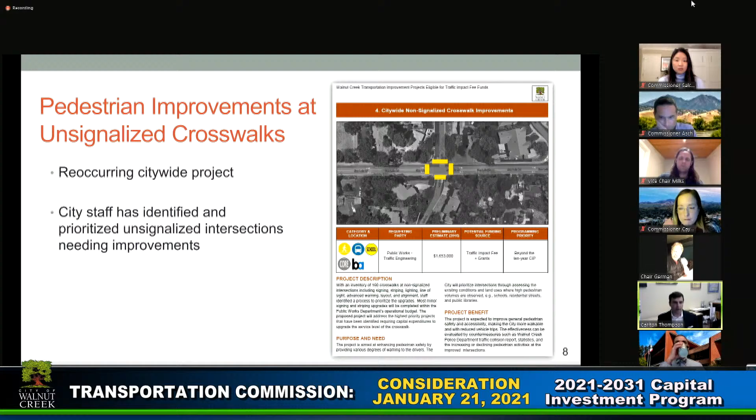The next project is the bicycle master plan. This is also project money to put into implementing facilities per the bicycle master plan. We've done a little bit of this already, and we're going to continue to add this to both the CIP and continue all the way out through the cycle, and then roll it into each of the budget cycles, the capital budgets.

Walnut Boulevard Sidewalk. This is a project that's been slipping back a couple of budget cycles, and we're going to commit to doing the preliminary design in '22 and '23. This is that sidewalk gap in front of Walnut Heights Elementary School. It's really difficult due to narrow roadway width and some right-of-way and grade difference, but this is that sidewalk gap closure between the county pieces that have already really been done up to the school.

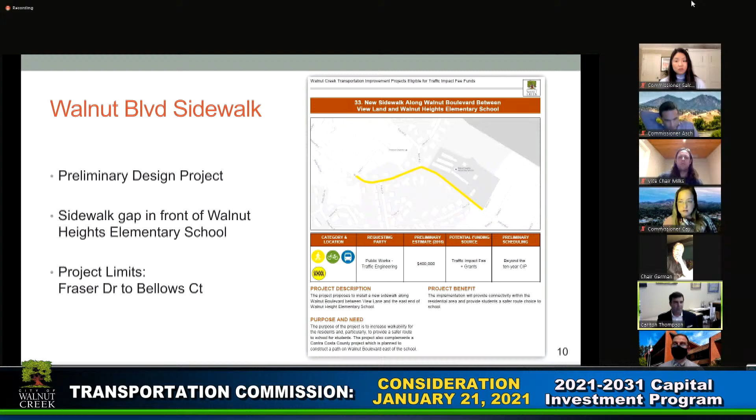This is a project that started off as just intersection improvements on Broadway that we brought to the commission back in 2019. And it has morphed into a whole corridor project that we've already started some preliminary layouts on, basically from YVR to Civic down the Broadway corridor.

This project is going to put a bit of Broadway on a road diet. We really wanted to make sure the commission got time to hear more details. I brought it to you back in November, and we said let's make this into one of those TIF eligible type projects, rather than looking at the intersection improvements themselves at Broadway and Arroyo and Broadway and Carlback. We're really looking at Broadway, between Ignacio Valley Road and Civic.

The intent here is that we want to implement a road diet, which is where you're removing a couple of travel lanes, reallocating that space for bicycle facilities, pedestrian facilities, and generally traffic calming and traffic safety improvements.

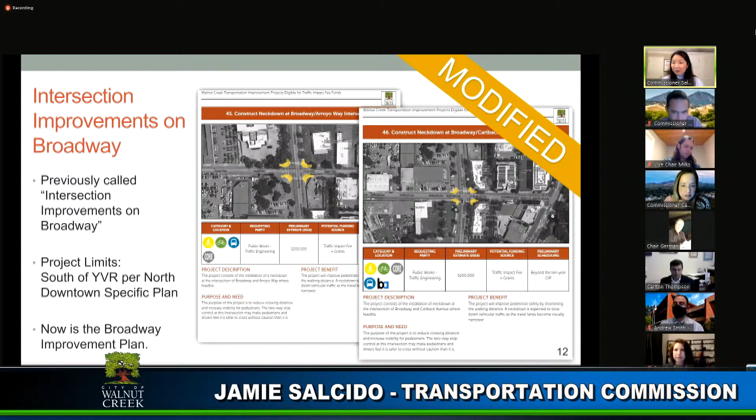Especially, I really like hearing that we'll be including green infrastructure, and I'm guessing that might include things like rainwater collection through cuts in the curbs, or I don't know exactly what would be included in that, but I like the idea of incorporating that, especially in the downtown area.

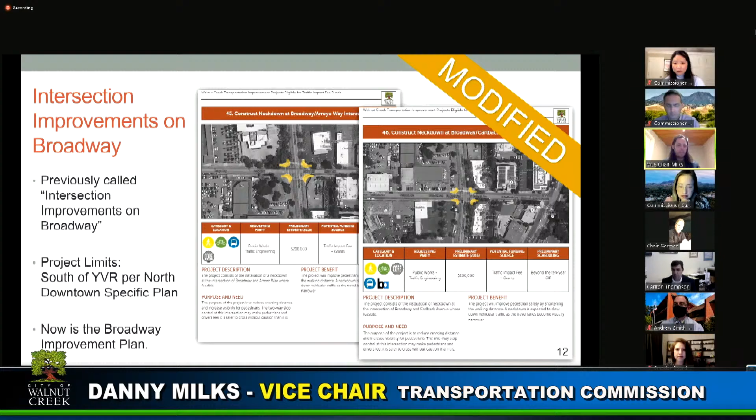I really like this project. I've always felt that between Civic Park and Main Street was kind of an ignored area. Everybody else has gotten improvements around there, but specifically on North Broadway, if you're trying to walk between the two, it's unpleasant, it's dangerous, it's not easy. So this is filling in that gap, and hopefully bringing a little attention to this part of downtown that has been neglected a bit - not intentionally, just by default. I wholeheartedly support this, and whatever you can do to make it easier for people to walk and bike between Civic Park and downtown would be great. And then also considering it might be going in with livable communities and affordable housing.

Car ownership is at least $10,000 a year according to any estimate. So if you talk about affordable housing, you can't talk about that without the whole picture, which includes transportation and options for walking, biking, mass transit, and BART. That to me ties it all together.

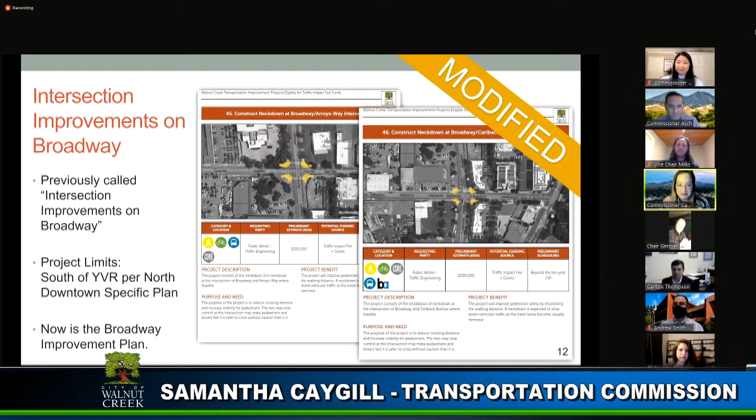This is Commissioner Caygill. You have my support as well. I think it's a fantastic project. Anything that helps move forward affordable housing, and also provides residents with access to our city's core, and transit, is just a fantastic project. I agree, it is a scary experience being a pedestrian in some of those areas, and crossing Broadway in some areas can be pretty scary. So I'm excited to see it move forward.

Would you mind pointing out on the map exactly where the housing is going to be located? It's not actually on any of these locations, but the housing location is at the intersection of Ignacio Valley Road and Civic. So it's just up to the north of where we're showing these maps. It's the southwest corner, the old abandoned gas station.

And separate from that, we've been receiving interest on the former DMV site, which is right there at the corner of Arroyo and Broadway, for some mixed use development in accordance with the North Downtown Specific Plan.

Fantastic. I would imagine that construction on top of an old gas station site will require quite a bit of environmental cleanup, hopefully. I wonder how long that will take. Yes, there's definitely something that would be analyzed and addressed before construction begins. My understanding is that a fair bit, if not all, of the necessary remediation has already occurred on that site. I think the tanks and everything are out of the ground. I could be wrong, but I believe that's the case.

Does this plan also include the abandoned restaurant across the street from the gas station? I'm sorry, what was the question there? Across the street from the gas station is an abandoned restaurant office now. Oh yes, adjacent to 1111 Civic, where the Mechanics Bank headquarters is. It might be now - a long time ago it was a restaurant.

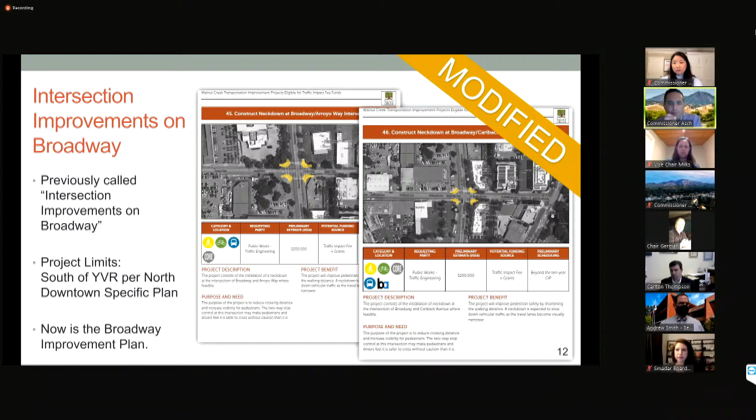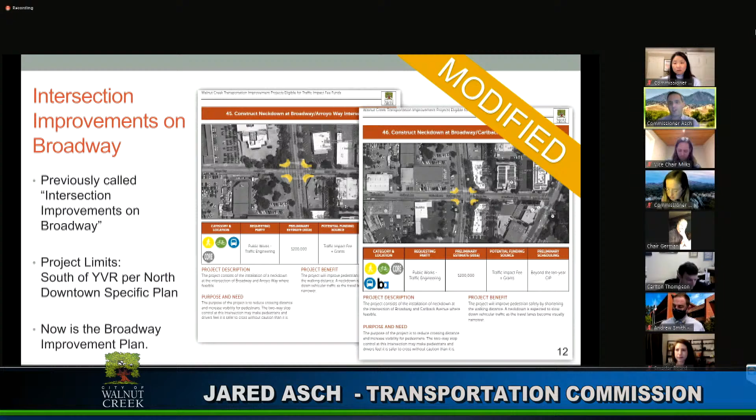So I like the project, I like the concept, I like that you're covering a lot of elements. As part of a traffic slowdown, which I get is the safety aspect, how does that affect the flow of cars, both in a normal non-COVID world of transportation down YVR towards BART and 680 and all of that in particular? Yeah, great question.

So this location actually was evaluated in the North Downtown Specific Plan and was specifically identified as an opportunity site for a road diet. Broadway got overbuilt on this segment. It doesn't really connect you to much - you end up kind of at a dead end. So right now people use it as a cut through, but it doesn't really gain you all that much in terms of travel time. I wouldn't take it. So we would rather put more effort on improving operations on the path of least resistance here. It was already evaluated as part of that North Downtown Specific Plan from the traffic analysis perspective, and we feel pretty good about not having to need that additional lane in each direction.

I will say that what we looked at preliminarily for this piece will line up with what we've recently completed on Broadway as part of the Broadway Parkside project, as we've reconfigured the lanes and added the bike lane on that segment north of YVR on Broadway.

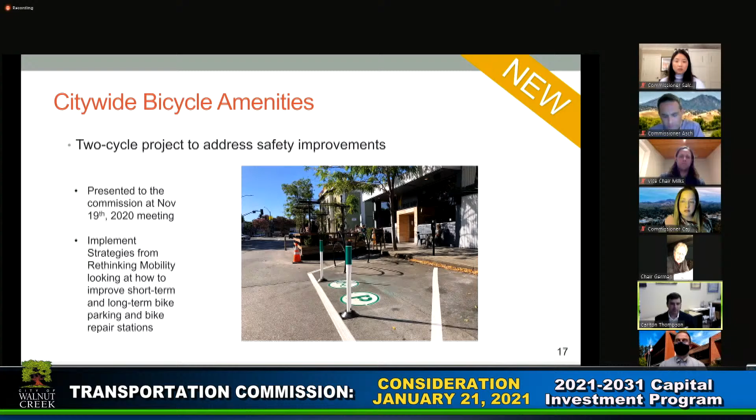Okay, so this is a summary. This is that first 2-year cycle. For 22, 23, this will become the transportation inputs to the capital budget. This is the amounts we think those projects are going to cost. And if there's anything unfunded, you'll see that in the far right-hand column before the notes.

There may be some opportunities for some grant funding or some funding to come from somewhere else. But right now, we're not recommending TIF money to go towards that particular project unless the commission decides otherwise. I will say that I'm starting with an estimated starting number of 4.6 million, so the TIF fund is healthy, and this allocation, if it goes forward as shown, would pull $1.4 million out of that fund for these projects.

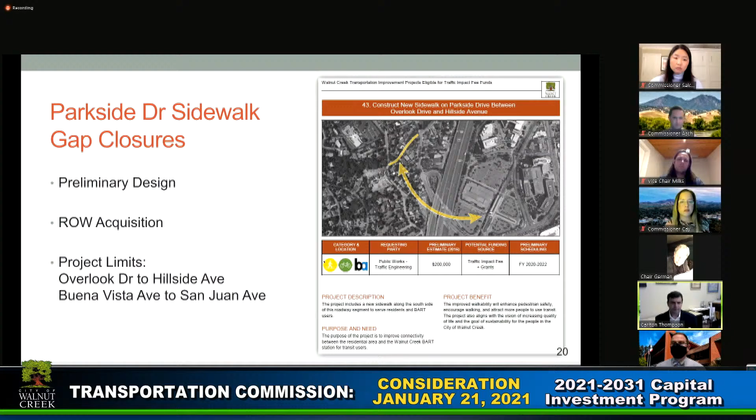This one is the Mobility Hubs project. It's been on there for a little bit. And I think as originally envisioned, the Mobility Hubs project was different than maybe it will be as it goes forward. Talking to the transportation planning staff, they will be looking for a possible TLC grant to fund $200,000 to start to really study this in more detail. But I know that they had originally looked at doing some bike share stations. That probably won't be what comes forward, but it may be something related to bicycles and charging or something like that.

I can add to that a little bit on the mobility hubs with regard to funding. We were approved a TLC grant, Transportation for Livable Communities, from CCTA, funded through Measure J, the transportation sales tax. But the COVID pandemic has had a significant impact on sales tax revenue, and since we hadn't actually been allocated the funds yet, this project, along with others benefiting from the same grant, has had its funding put on hold. It may come forward in the future, it may not, depending on anticipated sales tax revenues. So it's on hold for now, but we're still planning on going forward with it, just not right away.

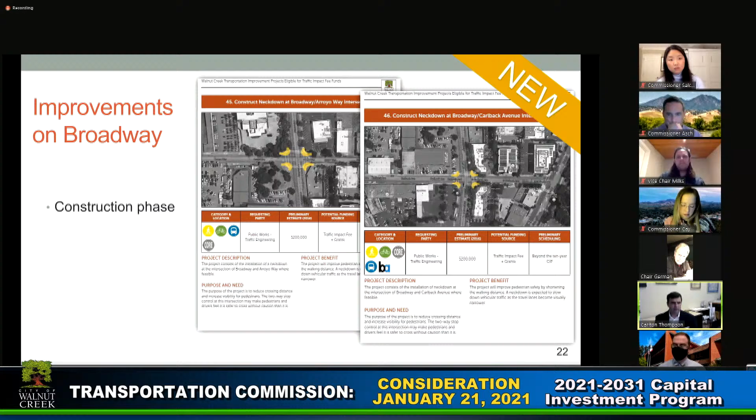Ygnacio Valley Road Safe and Smart Corridor Study - that's a mouthful. This project was suggested by the Transportation Commission in 2019 while we were doing our previous CIP update. It came out of discussion where it was suggested that we not only look around the BART station for connections to move people across YVR, but look holistically at the whole YVR corridor. So this will be a multimodal corridor study in partnership with CCTA. We've talked to them about this already, as it's more of a regional effort since YVR is such a heavily used transportation corridor for a lot of the county. That's kind of all I have for this one right now.

This is a big deal, actually, because it starts to set up some projects you're going to see later in the CIP, projects that provide other connections. Doing this study soon or early enough, with some of the money from CCTA that we hope to get as we come out of the COVID environment, will really help unlock and define some of those later projects. You want to add anything, Smadar? Any questions? If Smadar would like to add something, I don't want to interrupt that train of thought, but okay.

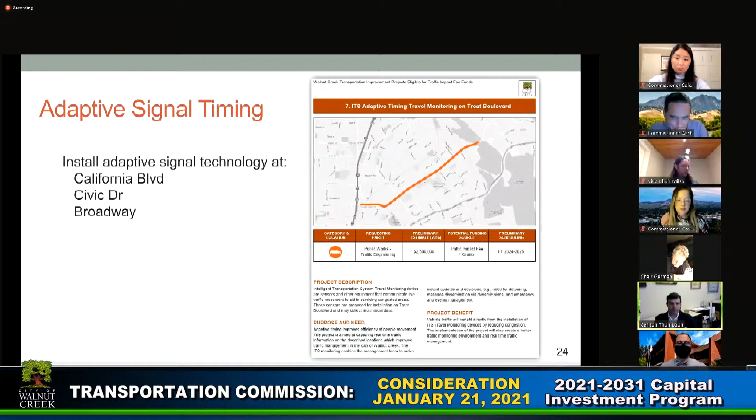The next thing in here is the Main Street intersection redesign. There are two intersections, at Bonanza and Cypress on Main Street. They are two of the oldest intersections in town, and it would really help to improve pedestrian flow. We have a hard time moving those signals right now because they're very old, they're the only concrete poles we have in town, and they really interrupt the ability to modify the curb ramps.

There may be a companion project as part of some of the downtown relook that we may be able to partner up with, and it may come forward a little faster. But anyway, this is to focus on Main Street and those two intersections in particular. Of course, we'd also be looking at bicycle mobility through there, since we're already looking at designing some bike lanes.

So this is the Lincoln Avenue bike path, and this is the design piece of that, from Iron Horse Trail to Main Street. The pop-up was successful in getting feedback from neighbors and users, and this would kick off the true design of that component. You'll see later that it'll get constructed in a later CIP.

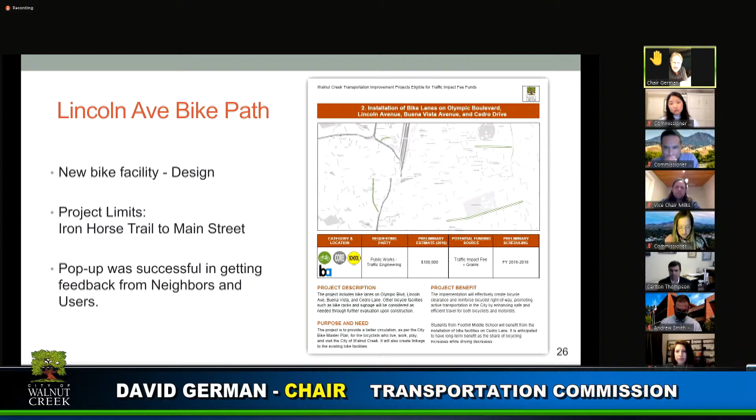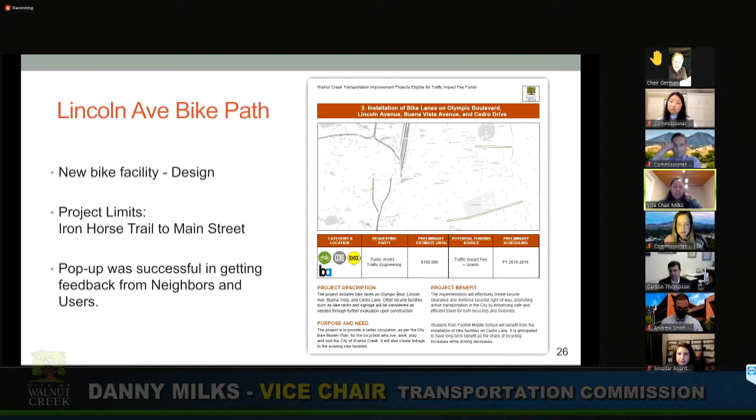Okay, that's what we need, we need your feedback. And this is one where we've already done extensive neighborhood outreach, community outreach, we've had a testing run. It seems like there might be a lot of options to get downtown, and there should be a lot of options for people who want to walk, bike, or use wheelchair access. This just seems to be one of the ones that has the most work done already, so it should be the closest to being done.

Also, one of the big question marks we originally had was what to do for the last section between Broadway and Main Street, and it seems like COVID and city staff already answered that. Not saying we don't need to actually build infrastructure there, but can we close that down or limit traffic on there? And it seems like the answer is a resounding yes. So now we're like, great, let's put this together.

So I personally would like to see this, at least the planning stage, move earlier so that we can, if possible, maybe get some quick build infrastructure in there within a few years, and then the ultimate time frame can still be several years out until we get the final grand plan. That's my personal opinion.

Anyone else on this one? Okay.

This is a new project for wayfinding and parking signage to help pedestrians and bicycles move around. This is in the downtown. There's not a lot of money programmed for this one, but it's probably not that hard to imagine. A few signs don't cost all that much.

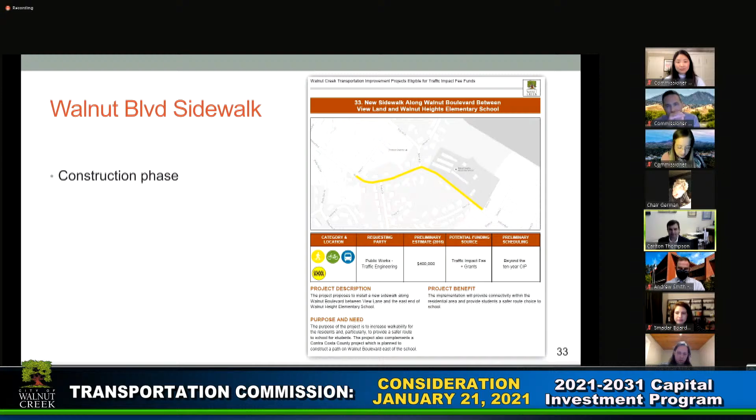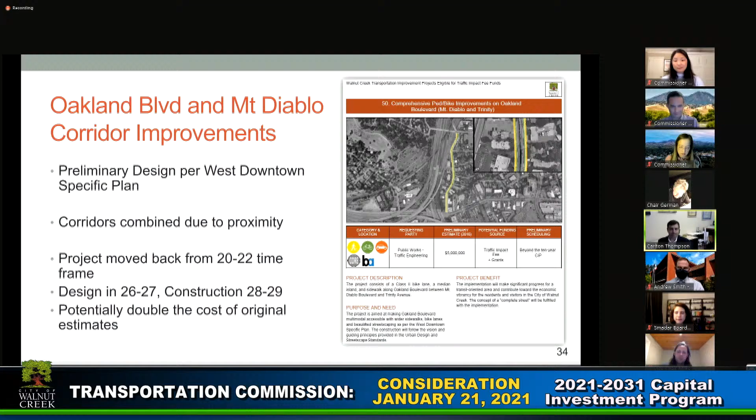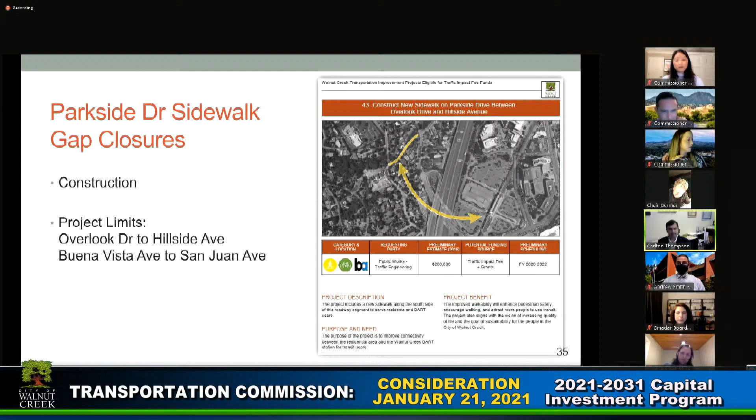This is the construction side of that Parkside Gap Closure. And this is the end of that third cycle.

You can see that forecast shows that we're kind of out of money at this point, still trying to spend 2.8 million. As I said in the staff report, I don't anticipate this actually being true, that we will run out of money. We will have development that continues and feeds the TIF, but it may not be enough to cover the full 2.8 by the time we get there either. So just be aware of that. Especially as we get into this third cycle, we really are guessing on the funding, and I start to really guess on how much these things are going to cost too.

And all the project cost estimates are based on what we know today. As we get closer to putting them in the capital budget, they'll actually get more robust and more vetted cost estimates.

Okay, so this is the next cycle. We're starting the projects in the fourth cycle. This is the Olympic Boulevard Trail Connector, to connect the bicycle and peds underneath of 680, down Olympic Boulevard, and out into the west part of town and out towards Lafayette. It requires a lot of work underneath of the freeways there, potentially widening some lanes and doing other things with the abutments on the Caltrans ramps and overcrossings. So this is going to take some environmental work, analysis, and design in coordination with Caltrans. We've pushed it out that far right now, looking at construction in '30 and '31.

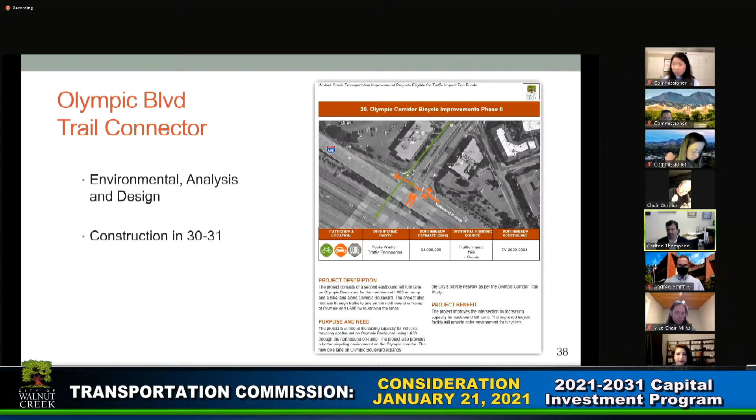This next one is Newell Avenue Bridge widening. This is a construction phase, but we're currently looking at some design options with the traffic engineering team, trying to figure out whether or not we really actually need to widen the bridge. This project could move forward much more quickly if we don't have to build that bridge.

Just so the commission understands, we are in design with two bridge projects right now. The bridge on South Main Street is well into design, and by the time we hit this piece, it will be well under construction. That is a significant bridge construction project. We're also working on the Bancroft Road bridge project, also in design, and probably will be in construction or completed by the time we get to this one. So just looking at bridge projects alone, there's a significant amount of work, and we use consultants for those.

But this is to look at improving the pedestrian connections from that South Broadway and those neighborhoods up the hill down into this part of downtown as it continues to develop. When I say pedestrians, I also mean incorporating all the bicycle amenities, because we are looking at that complete streets mindset in all these things that we do.

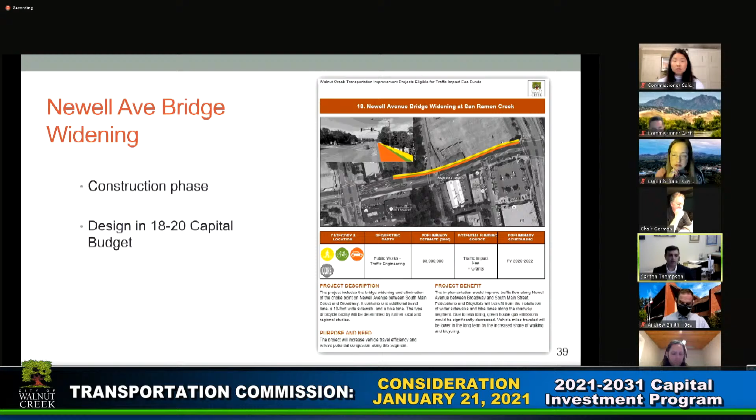The next project is the YVR sound wall and sidewalk. This is going to be a really tough project that impacts the neighborhood there that backs up to the sound wall. But to relocate that sound wall and get some sidewalk and some bicycle facility down that edge of YVR - again, this is one we'll look at in that corridor study, what we can and can't do through there, but it is very constrained. Its limits are from La Casa Via to North San Carlos Drive, right where you come down past John Muir, right up against that living wall or sound wall on the edge of the road. So this is to try to get through all of that.

How effective is that sound wall? I don't know.

Just curious, when I first started here, that sound wall had a lot of plants and it was hanging into the traffic and some other stuff. It's been trimmed back quite a bit right now, but I don't know.

Does that sound wall back up to the property line of the residents? Yes, sir, it does. I think if we had another opportunity to get in there and move that wall, we probably already would have done it. And there's a significant pole line, a PG&E pole line that runs down that edge too, you can see that in the picture here.

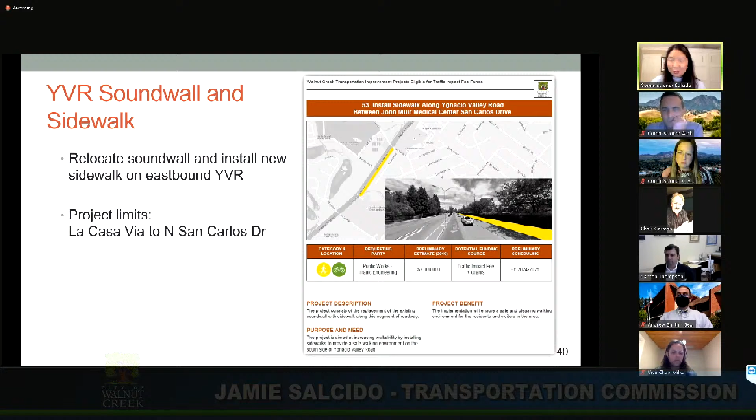Yeah, because right now along that part of that side of the road, there's no pedestrian access. You have to cross YVR, and then if you're going from the hospital to that shopping center to get lunch, you have to cross twice just to get a short distance away. There is a bike path out the backside of John Muir back into those neighborhoods to the east that crosses some stuff back there. So there is a way to get back to those neighborhoods, but there's not a way to go down Ygnacio from downtown. And if you're going all the way out, there's not a way to really walk or bike all the way out that way.

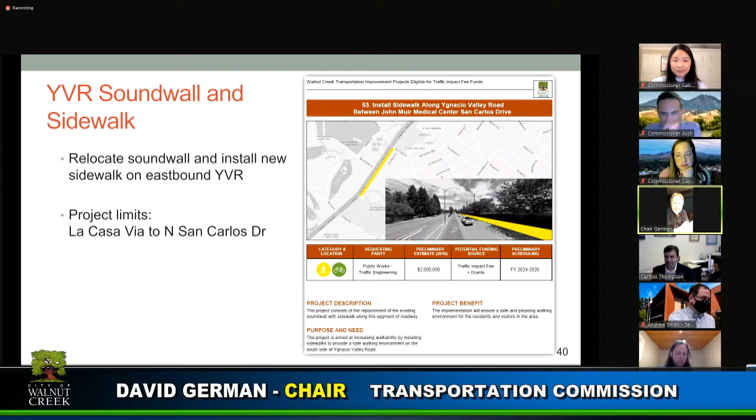So this project has been pushed back at least twice. Should it even stay on the list?

We're hoping that the corridor study will really help us understand what we can do inside the roadway, and figure out whether we can squeeze that roadway a little bit or make some changes with the lanes that might gain a little room towards the inside, but we don't know. We won't know until we actually get help studying that and looking at the whole corridor. Because if you just look at this one project by itself, you might make that change for that one little segment, and it might just mess up both ends. So we really don't want to do that. And then, of course, the utilities are a significant challenge.

Yeah, it does seem like a lot of these YVR projects are somewhat contingent on what comes out of that study, whether they remain relevant or not.

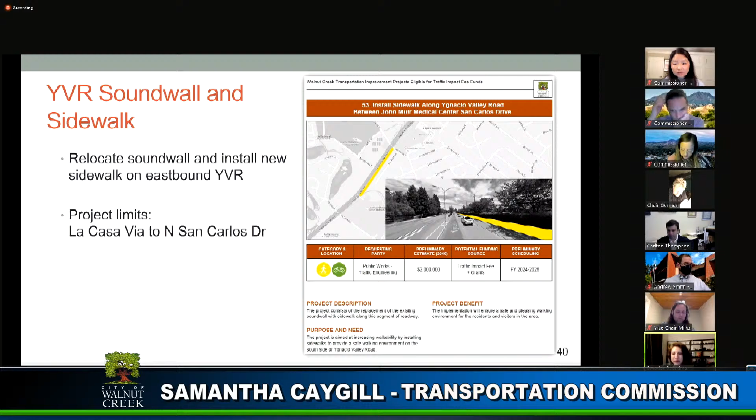Yeah, and I'll add to that, that's such a great point, because as you'll notice, we have all these projects on the list, that TIF list from several years ago. So we're actually pleased that the Transportation Commission, last time we brought the CIP to you all to look at, really suggested a corridor study and looking at this holistically, because there's a ton of different pieces here that should really be planned out simultaneously, and then we can go ahead and implement.

I can add that I've been advocating through Transpac, our sub-regional transportation coordinating committee that serves CCTA, to try to get funding for a corridor study in conjunction with the county and Concord. It's definitely received some positive reception, but money has gotten a little more scarce with sales tax revenue going down. But it is something we are definitely trying to go after on all available fronts.

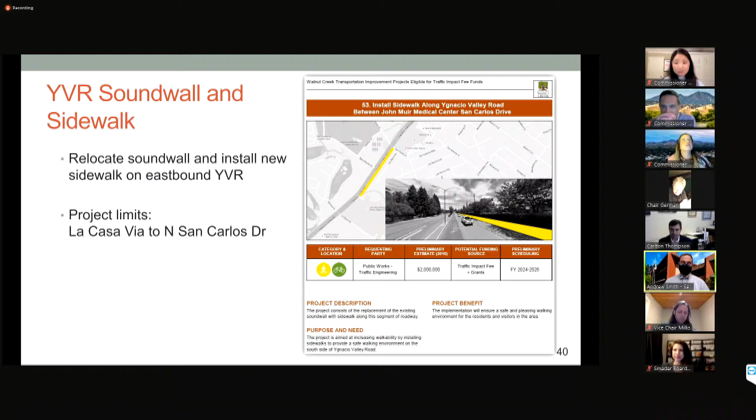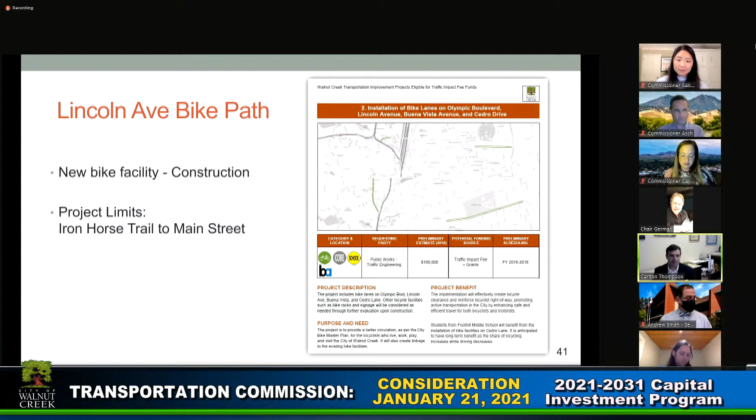Whoops, that's too far, okay, sorry. That brings us to the end of that fourth 2-year cycle out to 28, 29, and the spending that goes along with it.

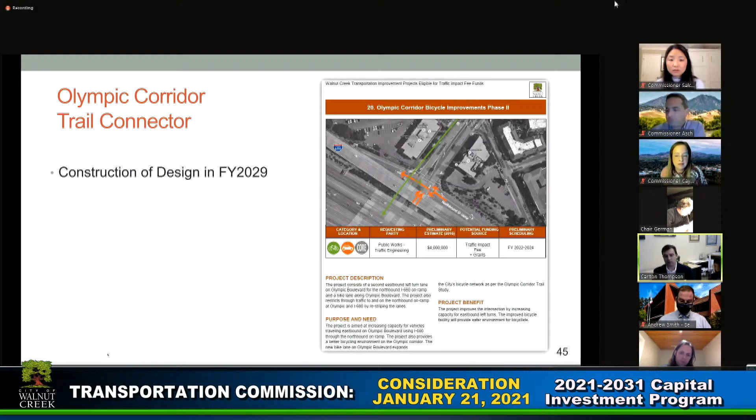This would be the construction of that Olympic Corridor Trail connector underneath of 680 and out down Olympic. It says FY 2029 for construction, from a design we'd hope to complete in 29. Then this would be construction of the Oakland Boulevard Mount Diablo corridor improvement piece. That's also assuming we get the money to do the design work and find the money to do the construction.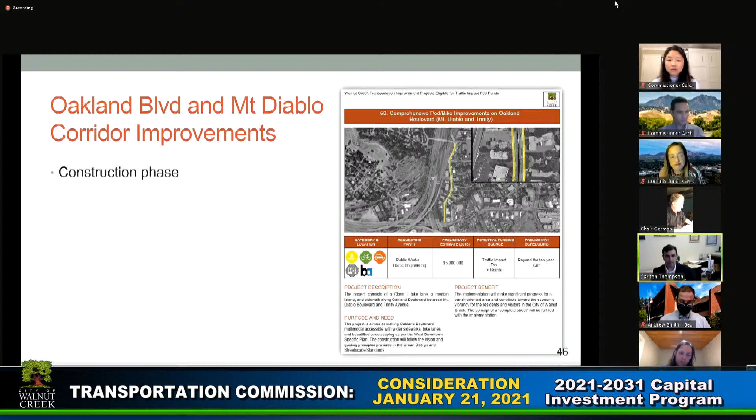It's projects like this, when we show them in the CIP, that help so that when a development comes in, we can point to the developer and say, you could build this too. You could build your piece of it, or we could partner up to do components of this work. So that's also the importance of having these projects sitting in the CIP, even if there's no funding really available for them. It helps the development community understand that we do have plans to do things along those frontages in these realms, and that we wish to add the bike and ped to these transportation facilities to make them truly multimodal.

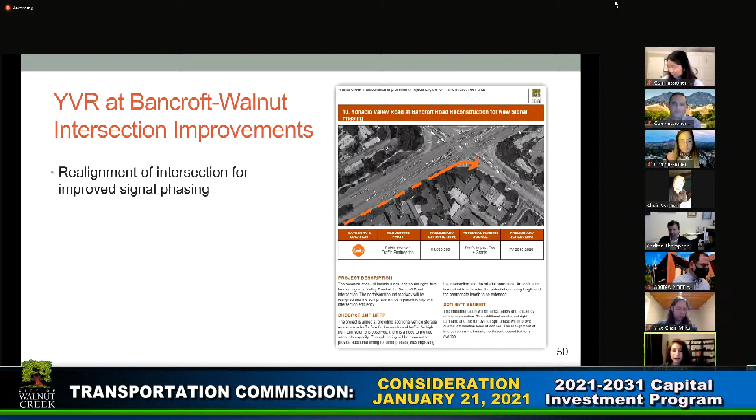Okay. This is the end of it, and you can see there are some really big numbers in the project cost estimates, about how much we think some of these projects may cost, at least looking at them right now. Some of these projects are in the $10 million range. So not to totally scare you, but that's just where we think they are right now, with the crystal ball that I have.

There was a project that really was on the list, might not have been on the list. We went after some Safe Routes to BART grant money. I had it in the FY21 capital budget. We did not win the grant. And this also was part of what really instigated that whole conversation about the YVR corridor study.

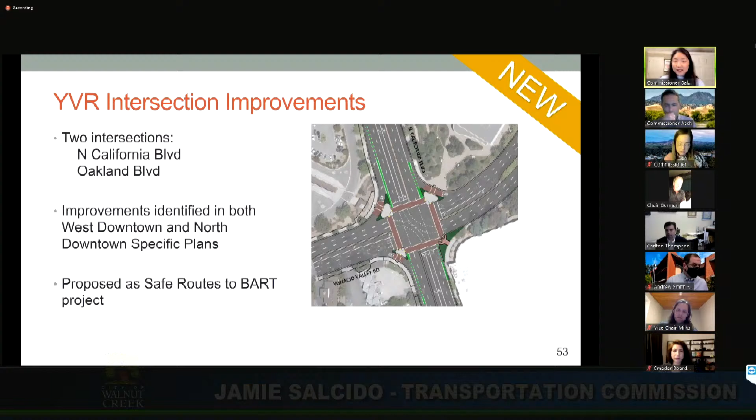I agree with Commissioner Cagle, and I'd like to see this in one of the earlier cycles, because I think there needs to be a lot of work done improving different modes along Ignacio Valley Road. Knowing that study won't happen for a while, and improvements after that are even further down the road, and since this is so close to downtown and the BART station, the easier we can make this intersection for pedestrians and bicyclists, the better, and the sooner we can make those improvements, the better. So I'm in agreement with the timeframe everyone else is talking about.

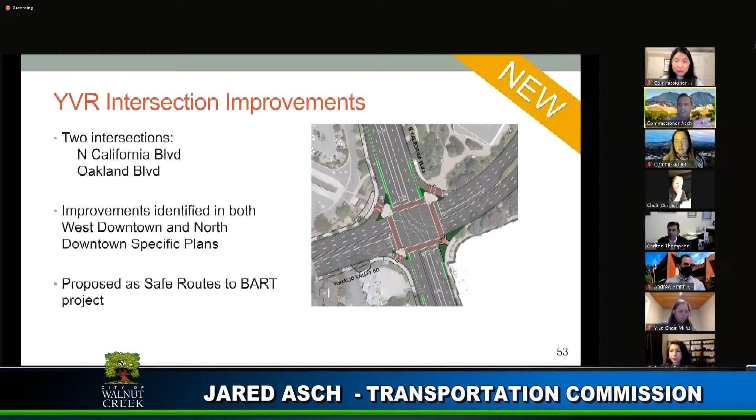If we don't get that Safe Routes to BART funding—which is kind of odd, since it is a safe route to BART—but since we don't control that, how does it impact things if we move this up to the top? Does it impact other projects in the TIF? Can you just explain that whole budgeting process?

If you were to say, please put TIF money to this, we really want you to build it, I would ask what projects you'd like to push later down the road to make room for it, and I'd like to know, based on priorities and other factors, how you feel about that. As I move forward and look at other funding streams, including the Measure J money, it could be that we find synergy with some other work. So I just want to say that, but it would be great to have some concrete feedback about what projects you'd put this in front of.

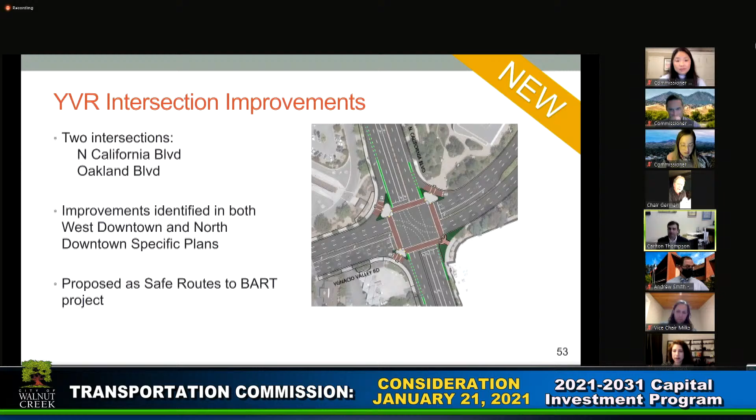So in my mind, it needs to happen very quickly, very soon—ideally before the apartments are done, so we're not having accidents with all the new residents there. So when I look at this schedule, the Treat Boulevard/Marchbanks project seems like a lower priority. Not unimportant, just not as vital. I'm with Danny on that.

You're $400,000 short on that project as it is, but you have $500,000 for that other one. So if you put that $500,000—250 toward the Shadelands projects and 250 toward, I don't know what the price of this intersection is—that frees up $500,000 when you're still wondering where another $400,000 is coming from. I did some back-of-the-napkin math: the Shadelands Sports Center will have about 300,000 trips per month from kids going in there, so I do think that's a priority to pay attention to on that budget.